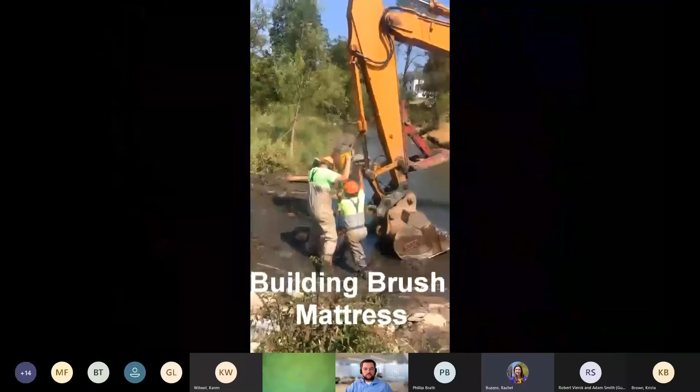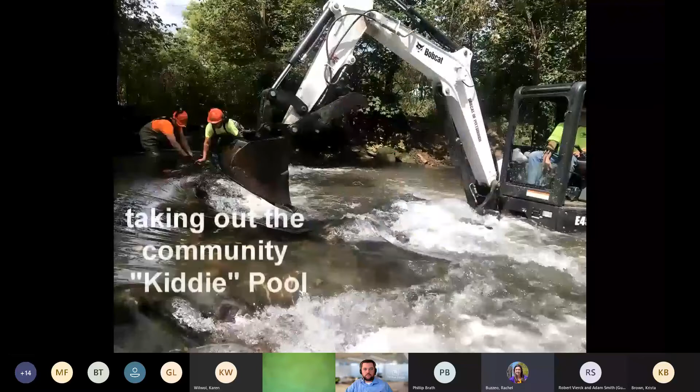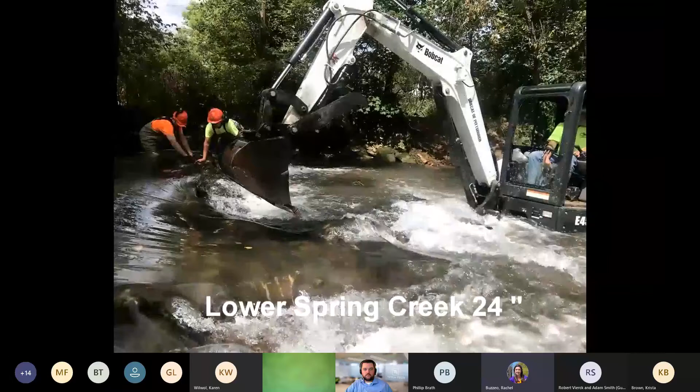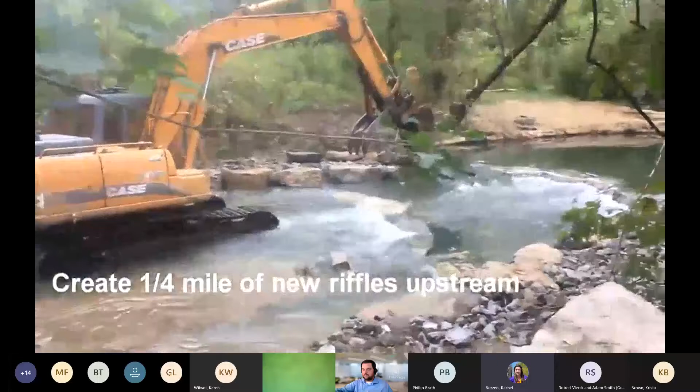We'll just go back to the share tray. Whenever, yep. Okay, I think we'll go back to the share tray. Yep, I think so. Are you getting it? Not yet. Click on that, and then we'll go to Chrome tab, and then there we go. There should be one there for present. There we go. All right, we see it. Great. Are we all set? We're on. Thanks a lot, Jason, appreciate it.

The second part of the project was Kissinger Meadow. This meadow was donated by a local landowner, and is also a site where the University Area Joint Authority processes reuse water and pipes it from the plant probably about 6 miles up, and it's distributed into the area that you're looking at.

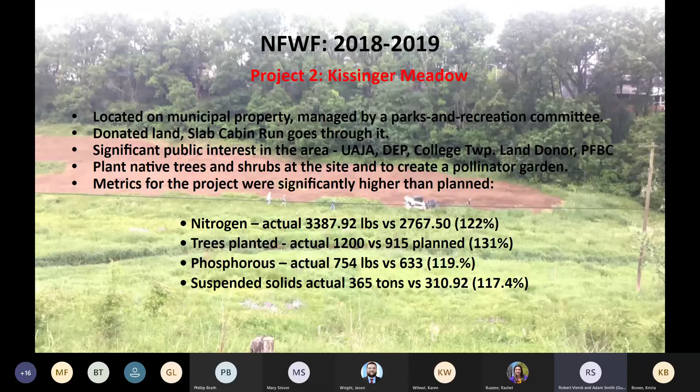Yeah, the silt sock was actually a donation. The guy that we know, Joe Greco, approached the Spring Creek chapter and U.S. Fish and Wildlife Service and said, "Hey, I got this silt sock constructed using hulls from switchgrass, and I'm willing to donate it for this project." And we're like, "Well, okay." And so we started to use it, and we're like, "Boy, oh boy, this is a product that, I know we're not really in the business of endorsing products, but it really worked very well."

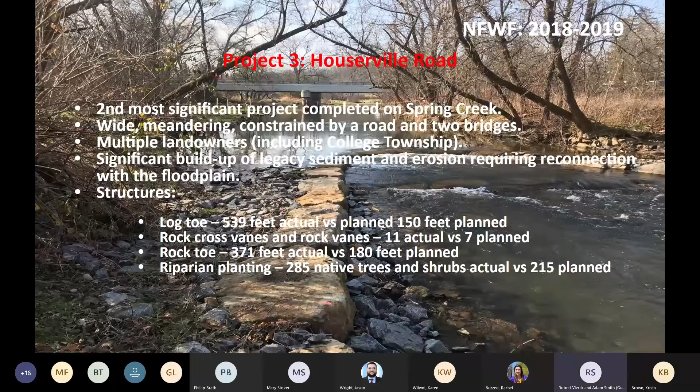Yeah. So what we're looking at in these photos was the upstream landowner, and just a little background about how Bob and I got into this. I live pretty close to this site, so every day I would see how Spring Creek is, how we had 4 and 5 foot vertical banks, and talking with Bob, it's like, Bob, we can do a lot better. We had collaborated on another project with Spring Creek Trout Unlimited probably 2 years prior to that.

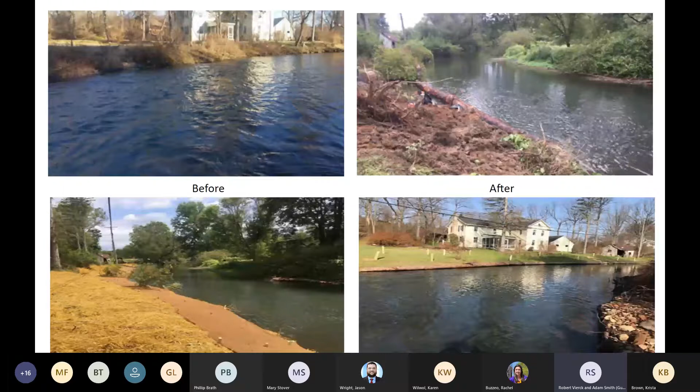The other thing is, it's tough to see, but there's a shed down there. The landowner asked us if we could maybe throw in a set of steps. And we had wall rock to build our vanes. We're like, yeah, sure, we can do that. And so we did. You know, we thought this was a nice thing to do for this landowner. So we did. Let's see this next slide here.

This is the downstream, and you'll see we had a 4-foot bank. You see the left bank as we're looking up; it would be on the right hand side of the picture. A 4-foot bank, and you'll see a big oak tree there. Well, Bob mentioned this being a long process. From when we first looked at it until we showed up, which was probably 3 years later, the tree had been in the water. The landowners had been cutting it up for the past year. Most of the tree was gone. It took another big chunk of bank there.

But you can see we went from a 4-foot bank; again, built a mud sill here, stabilized that bank. Lots of overhead cover there for trout as well. Just a little bit more about that last structure. That very same landowner saw the steps we did for the neighbor and said, hey, can you build a set of steps for us as well? So we did. It just kind of snowballed. Everybody liked the steps.

The kiddie pool. Let me tell you about politics, especially local community politics. So I'm talking to my kids, talking to the neighborhood kids, and they said, are you going to take out the swimming hole? I said, we sure are, but we're going to put it back. There's no way we could have even thought about doing anything here if the kids weren't reassured that the swimming hole would be there. So you can see how many rocks the kids had piled up here. And I'm saying it's kids; I think they probably had some grown-ups helping.

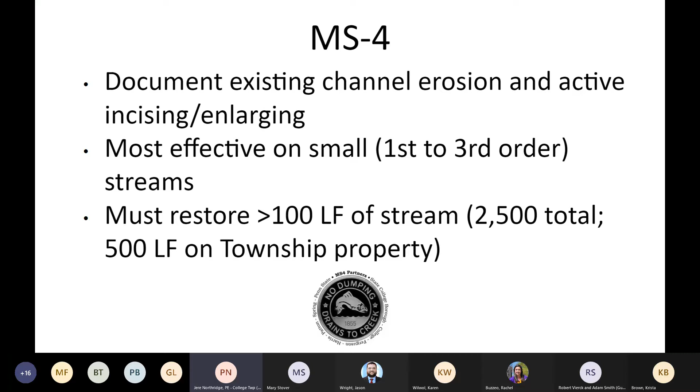So prior to the construction, we went in and we actually photographed and documented the channel erosion. This is one of the smaller streams that the expert panel report identifies as a target. And while the entire project performed by Fish and Wildlife Services, I believe you said over 2,500 feet, 500 feet of this is township property. The rain garden that was previously shown, that small pool area, the outfalls that are upstream are riparian buffer area that was donated with the construction of a development several years ago. And so that was the area that was targeted for MS4 credit. Next slide.

As far as addressing the upslope area, on the College Township side of the stream, we can do that. We have more than enough space for riparian buffer and those types of things. It's the opposite side of the stream. We talked about 9 landowners earlier. So there's a couple in the College Township area where we'll actually need to approach them for their easements and then develop a longer term management plan beyond just this capital construction for that effort.

So upslope areas on the College Township side, we do have riparian protections. I believe Clearwater Conservancy has gone in on the opposite side and worked with those neighbors to also plant riparian protections. I do not have in hand an easement that would give College Township long-term maintenance of that area. Both stream banks in this area are protected. Both stream banks have been corrected, and as it indicates here, 35 feet is the minimum required under that expert panel report. Next slide.

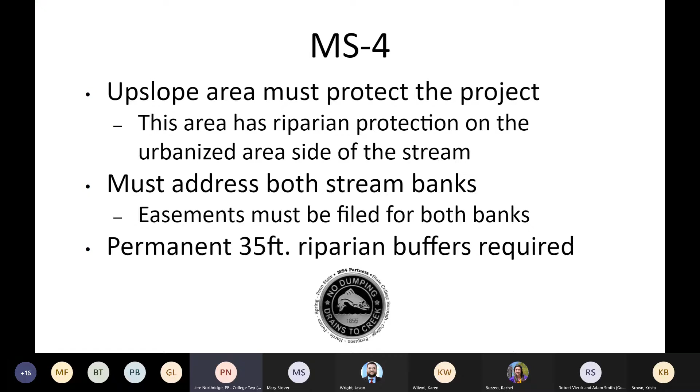As Adam mentioned, the privet, poison hemlock, honeysuckle, we'll develop some sort of operations and maintenance plan once we procure these easements to periodically spray and kind of set the ground rules for the township's role in long-term management. And then we'll be submitting these areas to DEP in probably the 2022 annual report. This project was submitted as part of the joint PRP to DEP.

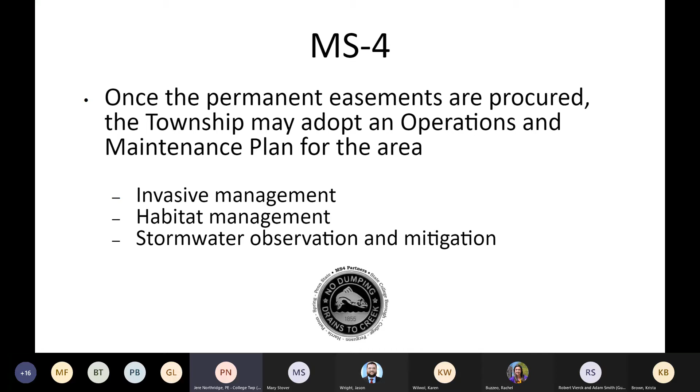DEP has blessed that joint PRP, but in the process of getting our MS4 permit renewals in the Centre Region, they were not issued until effective July 1st, 2020. So while everybody was on the same page in 2017 and working together, by the time we reached 2020, construction had gotten well ahead of the permitting process with DEP on the MS4 side of things. So next slide.

Thank you, Jere. I guess the last part of our presentation is kind of what we've learned along with Jere about this whole process. And they really fall into 3 categories. One of them, and you just kind of heard it, think long term. Partners count. And community relations is critical.

The MS4 requirements, 5-year horizon. When you're doing this, you've got grant writing. It's a multi-year process. You're going to have failures, probably most of the time. At least half the time you don't get the funding that you wanted. It's wonderful practice. No, not wonderful, but it's practice. You're in competition with others that all have good projects.

And one of the keys is establishing credibility with the funders. By way of example, the one that I mentioned, which is Sparrow Run, where the local foundation ponied up, they're ponying up 105,000, and they don't have the requirements of Growing Greener or reporting requirements of any, but they believed, based on our prior performance working together, that we could execute and would execute improvement to the environment, improvement to the stream.